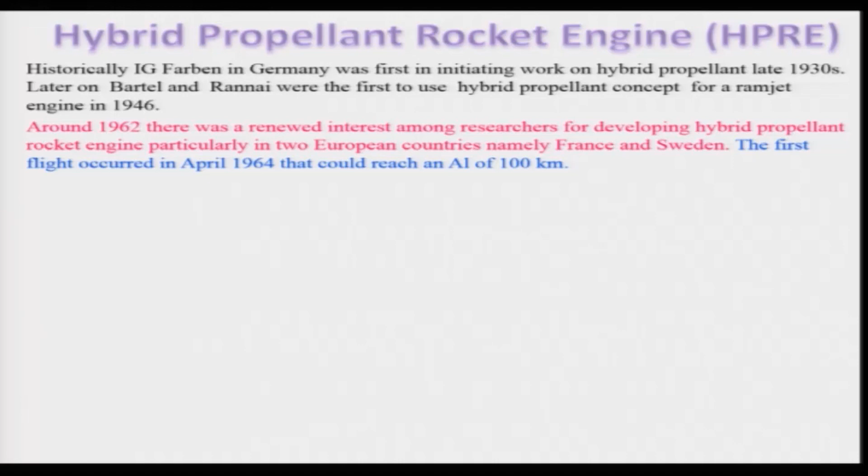There was a lull after that due to the Second World War, and again people took interest in the hybrid propellant rocket engine around 1962, when two European countries, namely France and Sweden, initiated research work and managed to develop a hybrid propellant rocket which could fly in April 1964 and reach an altitude of 100 kilometers. After that a lot of work has been done, and developed countries like the USA and Russia and other countries started working on it. I will just mention a few of their milestones.

The largest hybrid rocket engine was built around the mid 1980s by AMROC, designed for a space booster using the H500 engine, which could produce a thrust of 312 kilonewtons lasting 70 seconds, using liquid oxygen and HTPB propellant. There are several programs on hybrid propellant rocket engines across the globe, but unfortunately they are not really being used very much by space agencies.

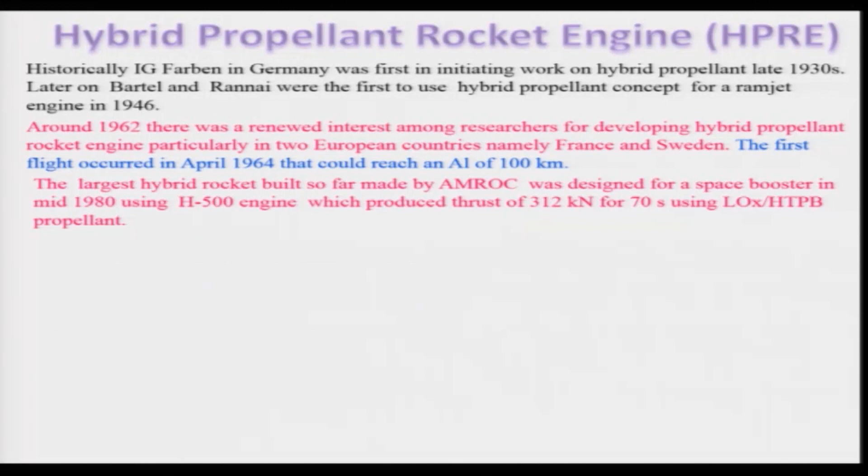Let us look at a schematic of a typical hybrid propellant rocket engine shown in this diagram. It has various components like a nozzle and the motor grain. This portion is your fuel grain, and this is your port, where the gases will be passing through, and it has injectors. This whole is known as the combustion chamber.

This combustion chamber also contains the igniters and an injector, which is not shown here, and it is connected to a feed system. We have already discussed the feed system for liquid propellant rocket engines; it is similar. Generally a very simple system is used, as only one liquid line has to be designed. The liquid oxidizer is contained in a tank and has to be pressurized using the gas pressure feed system, and this is your gas pressurization tank.

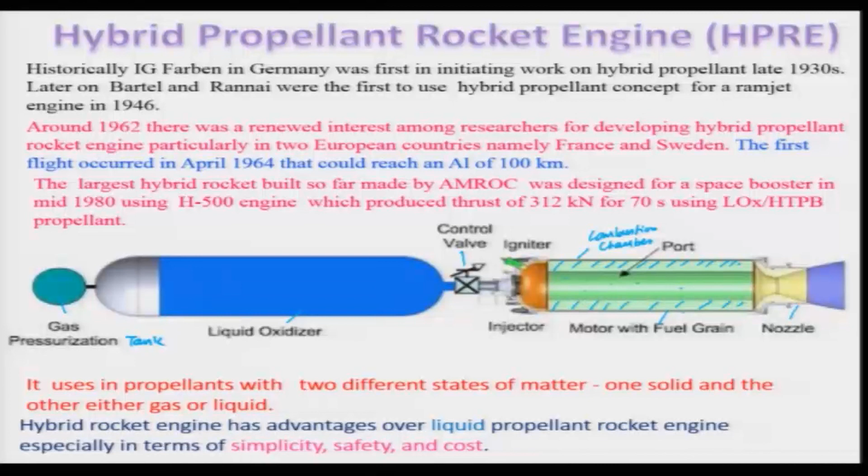So, as I told earlier, the hybrid rocket engine has advantages over the liquid propellant rocket engine, especially in terms of simplicity, safety and cost, as it has fewer components as compared to the liquid propellant rocket engine. Let us now look at the characteristic features of a hybrid propellant rocket engine.

The specific impulse of the hybrid propellant rocket engine lies above the solid propellant engine. However, it will be lower than the maximum value of the liquid propellant rocket engine, and its specific impulse varies even during steady state operation, because of the fact that there will be variation of oxidizer and fuel mixture ratio along the length and also along the time, and that is really one of the

problems one has to look at. It has the ability to change the thrust level smoothly over a wider range as compared to the solid propellant rocket engine. Its operation can be switched off and on easily during flight, unlike the solid propellant rocket engine. It has relatively lower system cost as compared to the liquid propellant rocket engine.

It has a higher safety envelope during the storage of propellant and operation of the rocket engine as compared to the solid propellant rocket engine and liquid propellant rocket engine. Its propellant utilization is much lower than that of the solid propellant rocket engine, as a certain sliver of the fuel propellant remains unutilized at the end of its operation.

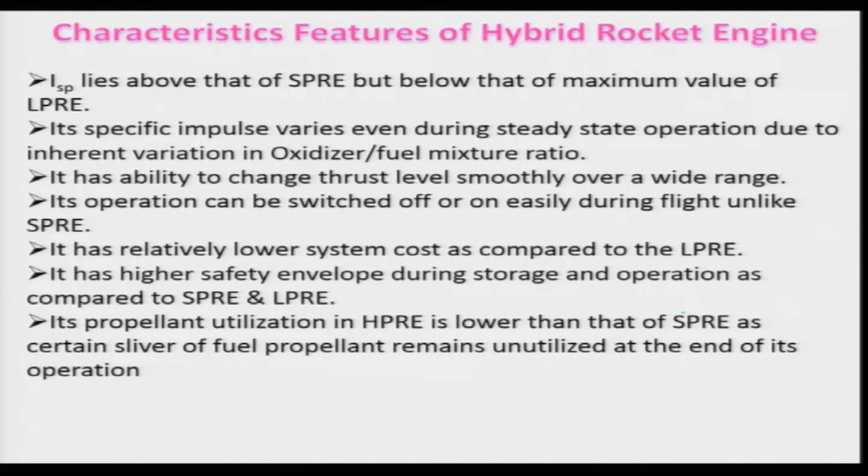So, let us look at a schematic of a typical hybrid propellant rocket engine, what we had seen. I just want to discuss it a little bit again. Of course, it will have a combustion chamber with a CD nozzle, and you can look at this, this is your solid propellant grain, and this is the port in which the oxidizer will be coming through. This is your injector plate through which the liquid oxidizer will be atomized, being fed by the feed system, and there is a spray. Of course, there is an igniter which will ignite the combustion in this combustion chamber.

But keep in mind there is another component, this is known as the mixing chamber, which will not be there in case of your liquid propellant engine. And that is very important, because the fuel and oxidizer have to be mixed and burned properly before really getting expanded in the CD nozzle.

Of course, it has a controlling valve as a part of the feed system, and the liquid oxidizer tank has a pressure regulating valve and the high pressure gas tank, and that will dictate how much time duration one can have this engine operated. And there is a diaphragm, as I told, and that will separate the liquid oxidizer tank from the high pressure gas, which happens to be inert gas. Generally, this inert gas is being used.

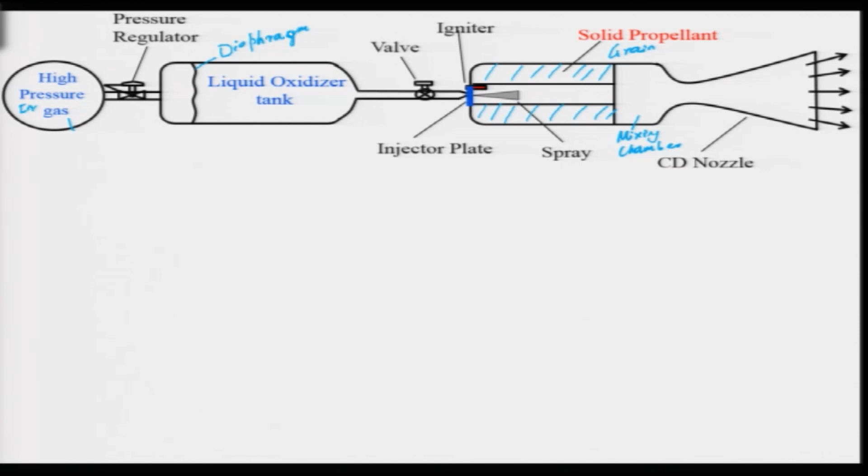And let us look at different kinds of propellant that can be used for a hybrid propellant rocket engine. Some of the fuels which are being used are polymers, polyethylene, HTPB, that is hydroxyl terminated polybutadiene, CTPB, paraffins, and several others, and whichever can be used as a fuel in case of solid propellant can be used. Whereas the oxidizer generally being used is a liquid oxidizer: hydrogen peroxide, nitrogen tetroxide, white fuming nitric acid, red fuming nitric acid, and several others.

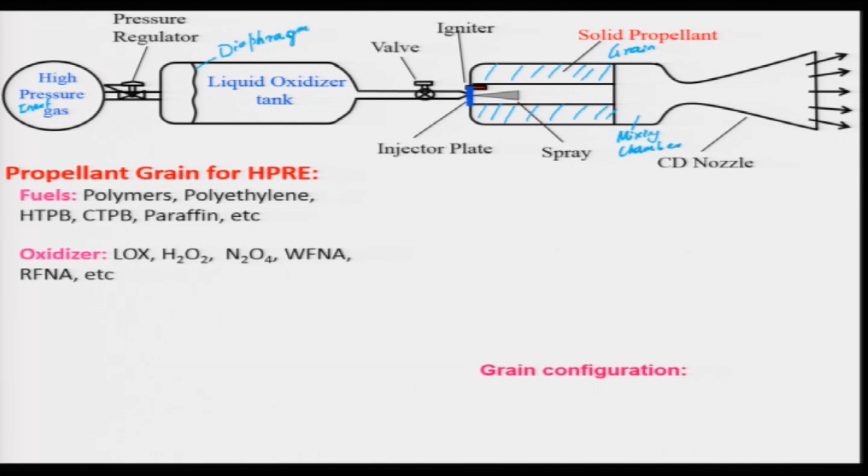And as I told earlier, we need to have the grain, like your solid fuel grain. This is basically solid fuel grain, and the grain configuration will be playing a major role as far as the performance of the hybrid propellant rocket engine is concerned, because it will be dictating the burning surface, and hence it affects the thrust law and its level of producing the thrust.

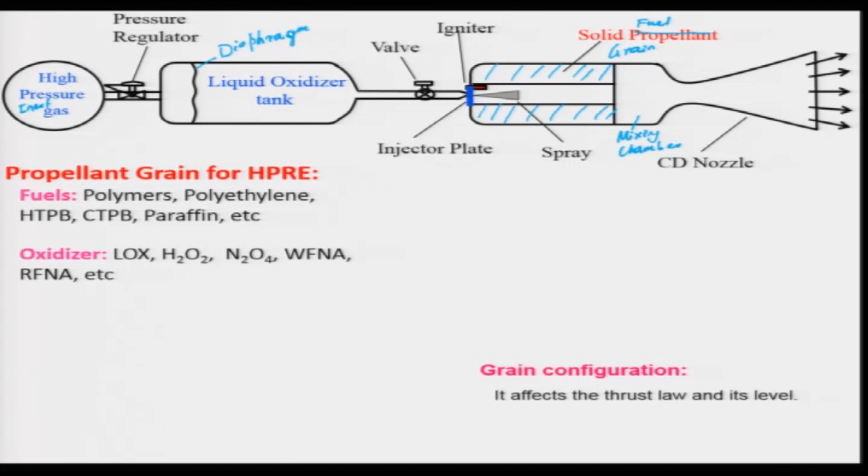Let us consider a cylindrical solid fuel grain, which is shown here, and in this case this is your oxidizer, and as a result the propellant will be burning in these directions, and the thrust level will be limited by that, and it will be dependent not only on the diameter of this solid fuel grain, but also on the length, and this is your length.

So, if you want to have a higher thrust and the diameter of the engine is limited due to some reason, then naturally one can get higher thrust by increasing the length. So, that is the limitation of the cylindrical solid fuel grain. Hence, the single port grain is not preferred in case of hybrid propellant rocket engine, particularly for high thrust level engines, as its regression rate is almost 3 times less than that of the solid propellant rocket engine. So, therefore, the multi port fuel grain is being designed and developed.

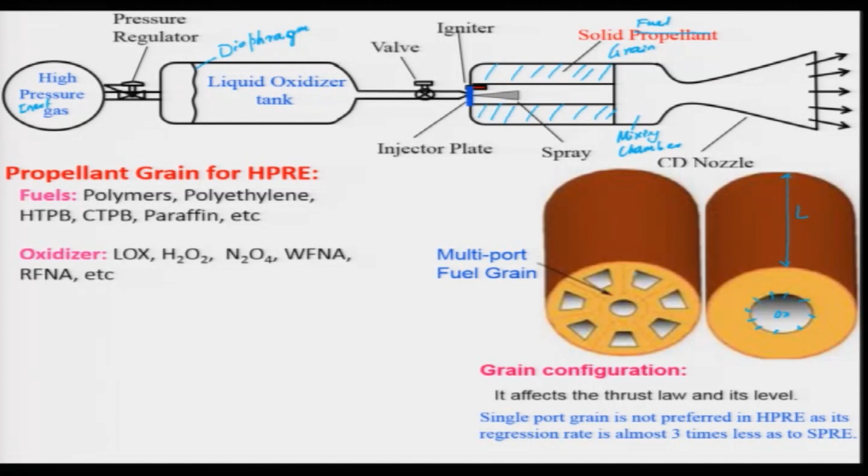So, let us look at a typical multi port fuel grain, and this is having a port at the center, and these are the other side ports, having basically a truncated shape, or we call them pie shaped combustion ports. And keep in mind, this is known as web, and if you look at, the thickness of the web is double here in this case, and when it is burned, naturally this surface will be moving perpendicular to that, and there will also be a round one, and this is the way it will be moving.

Now, the web spacing here to there has to be properly done, and in case these are meeting, this will also be moving in a circular manner, it goes on increasing, moving in the opposite way in this pie shaped combustion port. Naturally, a situation will come where it will be structurally very weak, because it is thinning down towards the end, and it may lead to some kind of falling down on the port itself. So, one has to be careful in designing these kinds of multi port fuel grains. And for that, of course, one can use a separator kind of thing which will give structural rigidity, that we will be discussing a little later on.

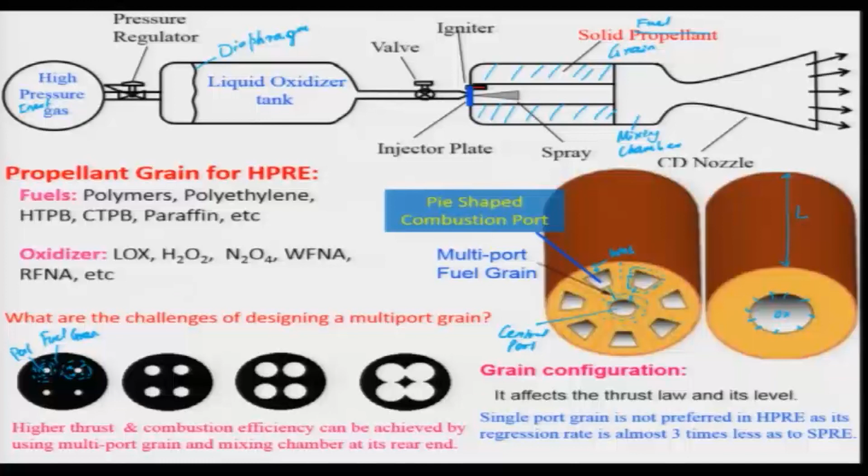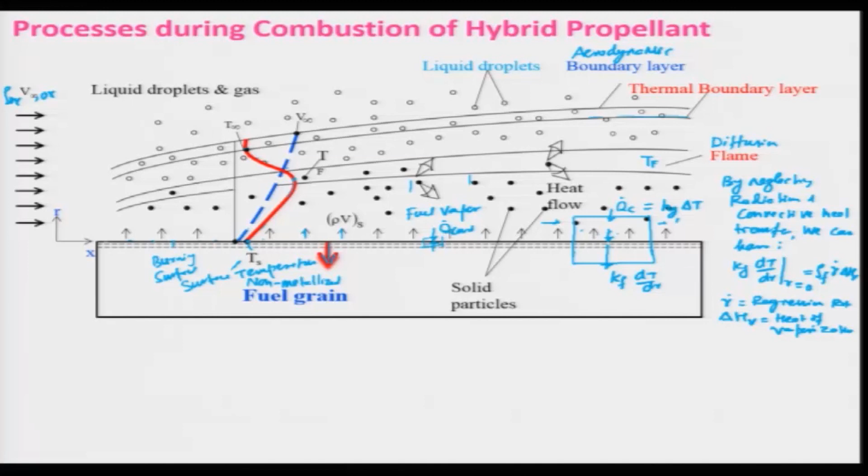And one can also solve the boundary layer equations for energy and for fluid flow, and then derive an expression for regression rate, which is quite complex. But we will be looking at the experimental results, because the processes are quite complex to model, and people have conducted experiments and come up with a semi-empirical relationship for the regression rate, that is r dot equals C G to the power m, where G is the total mass flux, equal to rho_g V_g, rho_g is the density of the gas, V_g is the velocity of the gas, m is the mass flux coefficient, and C is a constant.

And this is a very generic relationship for the regression rate, and for polyethylene and hydrogen peroxide, r dot is equal to 8 G to the power 0.45 centimeter per second. Keep in mind that this is valid for a characteristic velocity of 1530 to 1590 meter per second, equivalence ratio phi of 0.1 to 0.2, and chamber pressure of 3 megapascal.

So, you cannot really use it for other cases, whereas the more elaborate semi-empirical relation for the regression rate is rho_f r dot equals 0.038 G, G is your total mass flux, times Reynolds number Re_x to the power minus 0.2, and B to the power 0.23, where B is basically the ratio of delta h_t divided by delta H_v, and keep in mind that this is your enthalpy difference between the fuel surface and flame. And delta H_v, as I told earlier, is the heat of vaporization, and this is known as the blowing ratio.

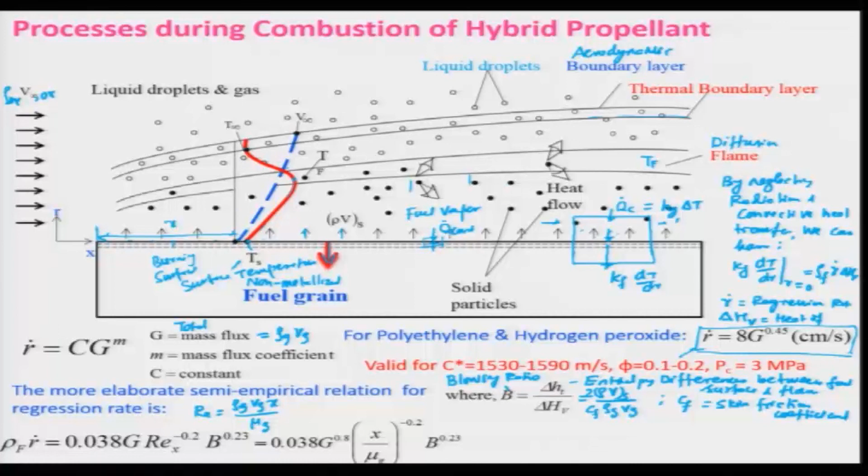If the mass flux increases, the regression rate will also increase, and it will be inversely proportional to the density of the fuel. It is also dependent weakly on the blowing ratio. So, it is quite a complex relationship as compared to the solid propellant relationship for the regression rate. So, with this we will stop over here.